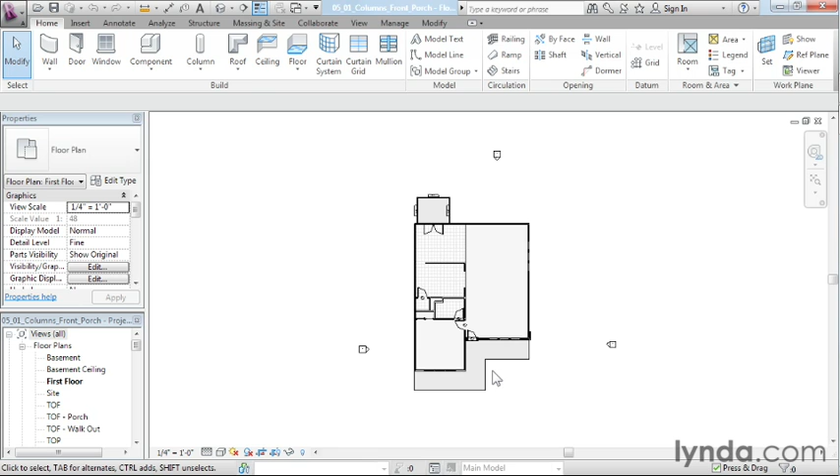In order to achieve this, we're going to be in the first floor plan, and I'm just going to zoom down here so that we can see our existing deck. Next, I need to draw in where each of these columns are going to be at. Now, I could just sort of click to place them and try to get them about right and then nudge them around until I get them into the right spot. But what I'm going to do is use the same techniques I have up to this point, which is just using my little annotation lines, select on detail lines here, and draw in where I want those base points to be at for each of those columns.

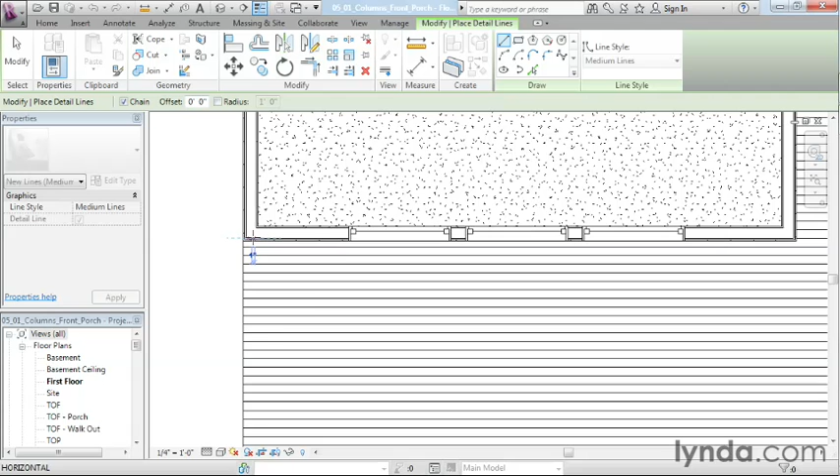Now, I know that the first one is going to need to be 5 foot 3/8 off of this structural point right here. So I'm just going to pick somewhere along the structural point of this wall and draw a line straight down 5 foot, 0 3/8 of an inch. And I know it's going to be somewhere in that area where that needs to be at.

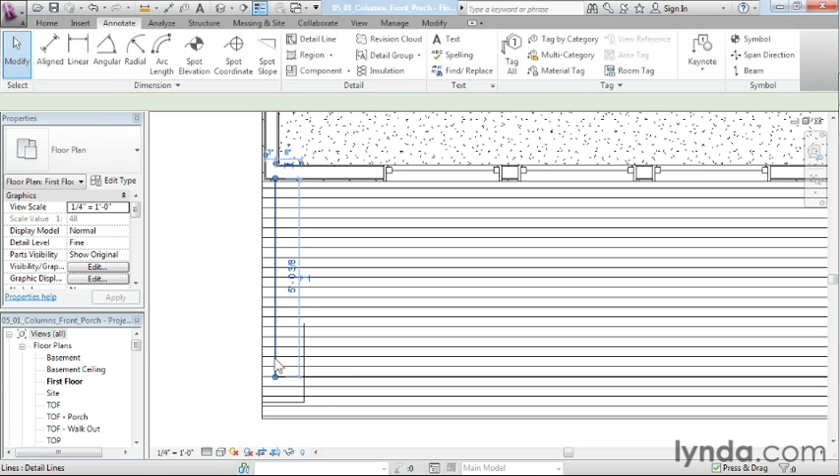Next, I'm going to do something similar, except I'm going to draw a line off of this edge over into this direction. And that's going to need to be 1 foot, 5/8 of an inch over. So in order to do that, I'm going to select on detail line, pick a point and come over 1 foot, 0 space 5/8. And I'm going to draw this line straight up from there. I no longer need this line because it's already given me the information that I need. And where that first column is going to need to go in at is where those two lines that we just drew a minute ago are crossing each other. I'm also going to delete this line right here just because we don't need it anymore.

Next, I'm going to come up here to the Home tab and we're going to look for our columns. And you can see between Component and Roof here, we have the Column command. If you select on the Column command, you'll see that we have a variety of columns here. Actually, in this case, we just have one kind of column. This one happens to be what's considered a structural column, but it's not really the kind of column that we need. We need more of an architectural column, one that has more architectural character to it than just this round column. So I'm going to hit the Escape key to get out of the command, and I'm going to click on this word column with a little down arrow right there. And instead of the structural column, I'm going to choose an architectural column off of the list. We have some rectangular columns, but we also have this fairly nice looking Doric column, and that's what I'd like to incorporate into our design.

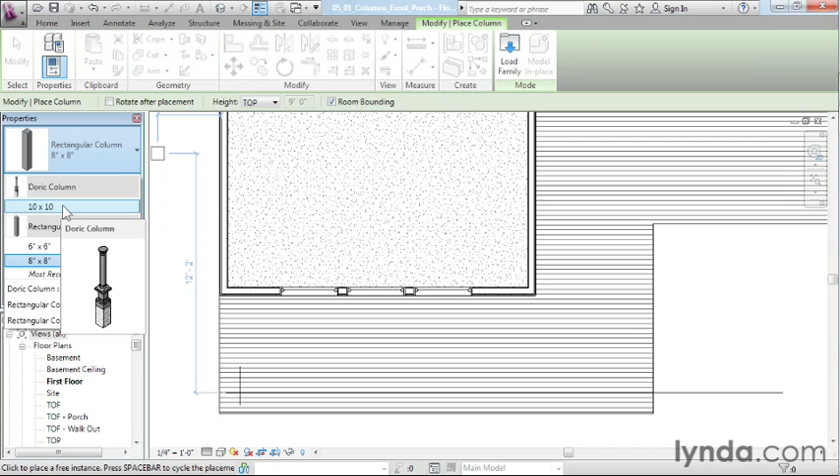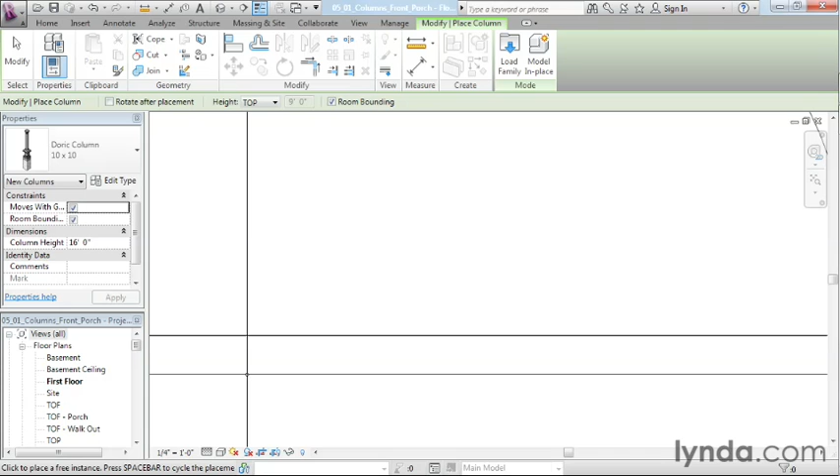So I'm going to select this 10 by 10 column and move over in this direction. Now I'm going to try to place it right here. It doesn't really snap, so you just have to get kind of close in there. And as soon as you can see there's nothing left of these little lines that are showing up on either side of this little diamond or circular shape here, you know that you've got it right on. So you can just click once you get to that point. If you zoom out, you'll see that you now have that column in its correct location.

Now I no longer need this line here at the center of it, so I'm just going to go ahead and delete that one out. In fact, I could even delete this line right here if I wanted to, but for right now, I'm just going to leave it around as a reference line, and I'll come back to it later. Next, I know that there's going to be another one of these directly over here. And in order to do that, I'm just going to select on this column right here, which we've already placed, and we know has the right distance off of the edge here and off of the edge here.

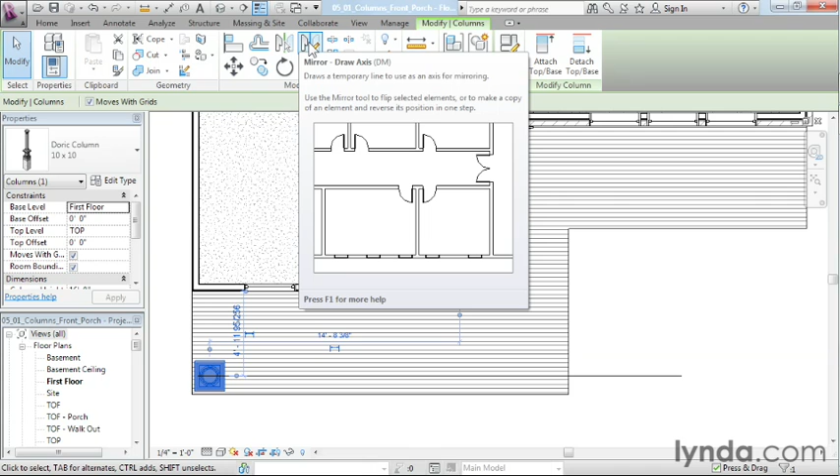I'm going to use a tool called the Mirror tool. There are really two of them, side by side: Mirror Pick axis and Mirror Draw axis. We're going to use the Mirror Draw axis for this one.

I'm going to move my cursor down until we see that little triangle on the outside edge of the deck. I'll select right here, move straight up, and click somewhere out here, making sure I don't touch any particular object. By doing that, it automatically mirrored that column from that location directly to the other side, and it's also given us the same spacing off of the ends.

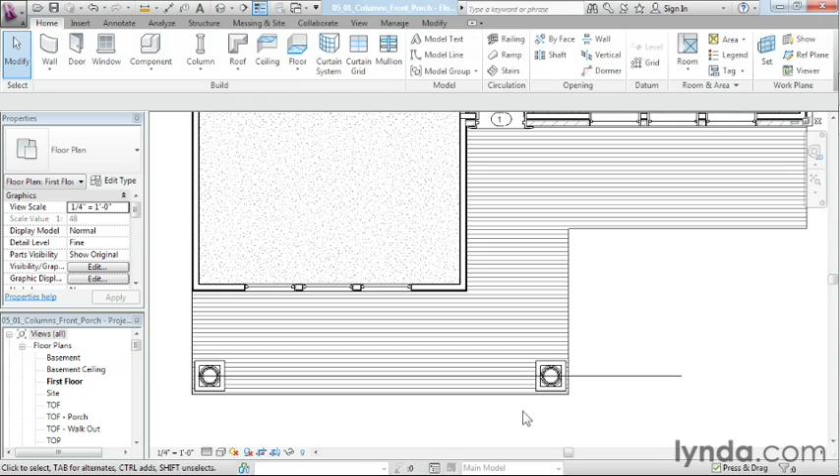Next, I'm going to select on this column and use the Copy command, copying this column over just 6 feet. So now we have 3 of our columns moving along here.

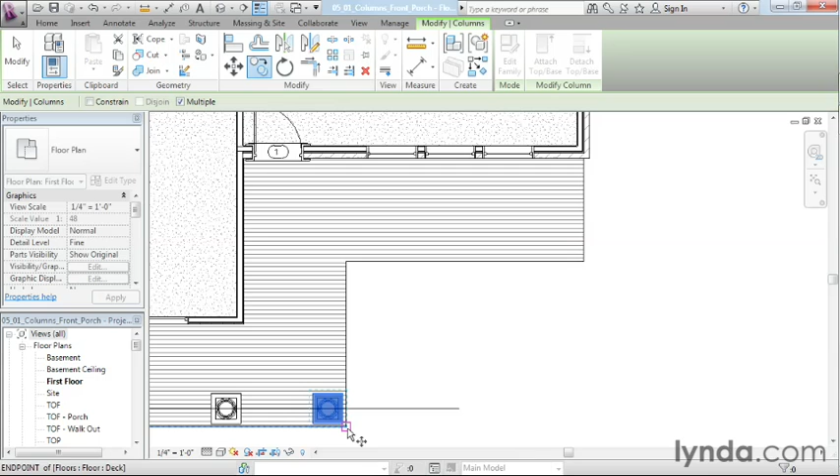Now, the good news is because we have this column and we know the distance from here to here, we can just copy it up to this location and over to this location. I'll select on this column, use the copy command, check multiple so we can do this multiple times, click the intersection at the edge of the deck, then move straight up, select this corner of the deck, move straight over, and select this intersection of the deck.

Now let me select one of these columns just to verify its properties. I'm seeing there's no real base offset, and also no top offset currently. That's going to be the same condition since we just copied it around each of these columns.

Anything in Revit you can adjust after the fact. The first thing I'm going to do is delete this line, since we no longer need that reference line.

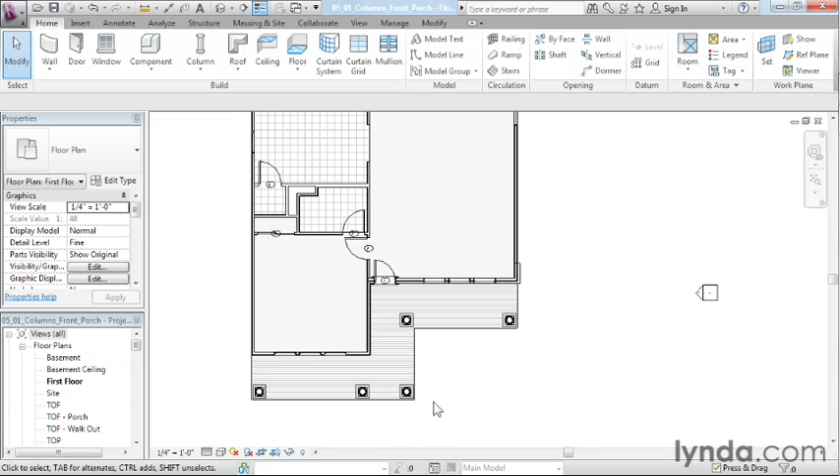Now I'm going to hold down the Control key and select on each and every one of those columns we just placed. I know from experience that the base offset is going to need to be offset off of the first floor. In this case, it seems to work best with this column to be just -5 inches down from the first floor, based on how the structure of the column is and its dimensions.

Next, as far as the top offset goes, I'm going to change this to be -1 foot, 4 inches. What this does is the base offset just drops where the column is located down 5 inches.

This top offset, on the other hand, actually affects where the top of the column is going to be. By dropping it down -1 foot, 4 inches, this allows us to better support the roof and support the location where the trusses, or the structural members, are going to be up there, supporting that big roof structure above.

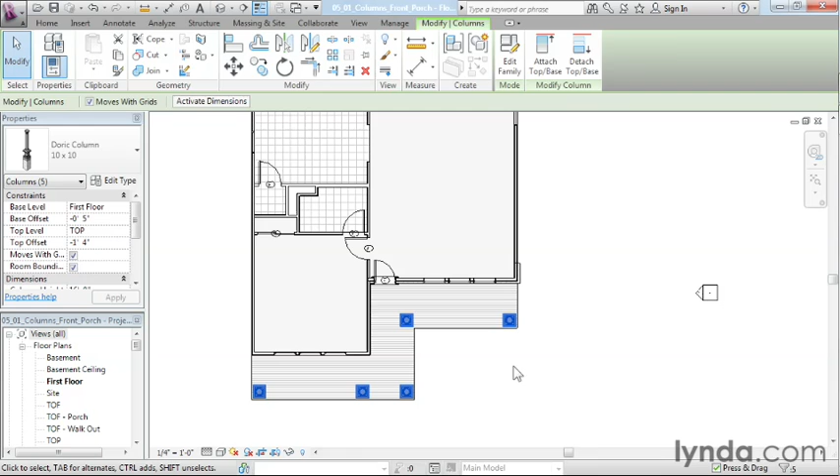Once you've done those, you can click apply or just move over in this direction. As soon as you see this grayed out, you know those properties have taken effect.

Now if we take a look at this in a 3D view and spin it around so we can see it in a front elevation, you can now see that we have our architectural columns in place.

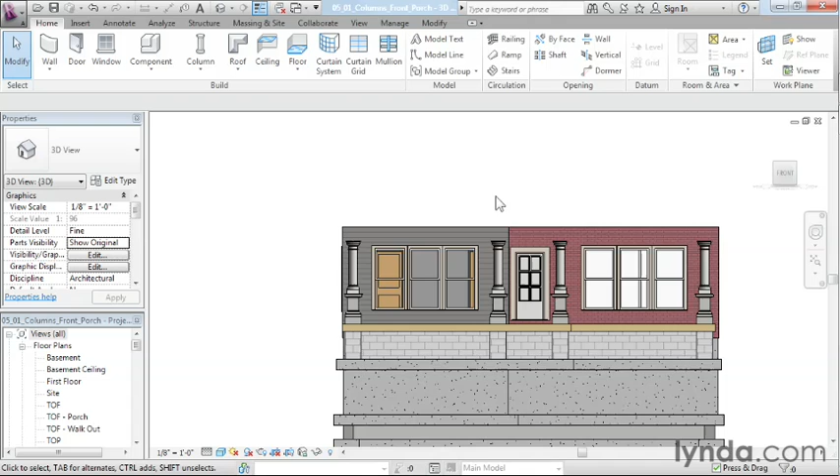One other thing I'll point out is if we look at this from a front elevation view, something critical has taken place, often overlooked in the design process. Back when we placed the doors and windows, I had us use very specific, almost odd dimensions off of the corner of the different walls. The reason is so these windows, this door, would be centered on our column spacings.

So that when it came time to look at this building from the front, we'd have uninterrupted views out of our windows, and when standing in front of the building, everything would look nice and centered and clean, like a finished, well thought out design.

So whenever you're placing your columns, it's not just a matter of where it's structurally the most sound or where it makes the most sense economically. You also need to consider where these columns make the most sense architecturally, so the aesthetics of the building are nice and your design is clean.